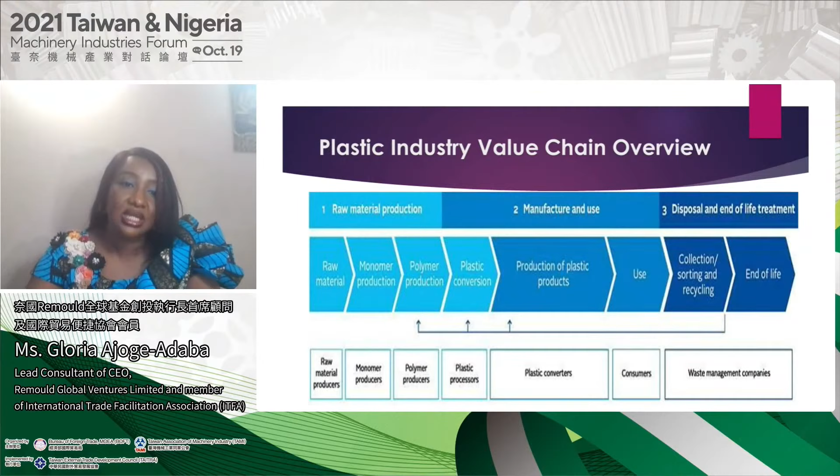An overview of the structure of the plastic industry value chain, from resin raw material production, manufacture and use, and the plastic waste management systems, will give a picture of the present needs in the Nigerian plastic industry. Let's start with raw material production of the plastic industry in Nigeria.

Indorama Eleme Petrochemicals plant in Port Harcourt, Nigeria South, is currently the largest producer of plastic resin in Nigeria. Its plants are designed to produce about 360 kilotons of polyethylene PE and 120 kilotons of polypropylene PP per annum. Polyethylene is produced under two major categories: high-density polyethylene HDPE and linear low-density polyethylene LLDPE. Polypropylene is produced under three main categories: homopolymer, random copolymer, and copolymer.

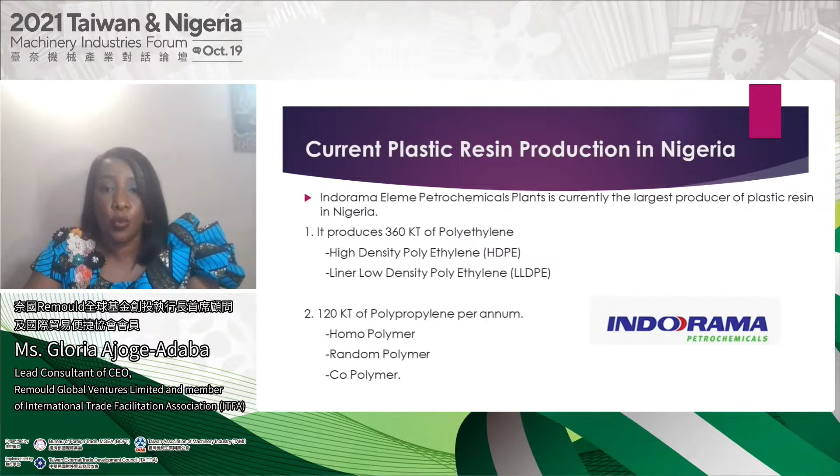Engee Polyethylene Terephthalate Manufacturing Company in Nigeria has a continuous polymerization system of high-quality food-grade PET resin plant in Ogun State, in southwestern Nigeria. A globally accredited supplier of PET, Engee has a daily PET resin production capacity of 450 tons and an annual capacity of 150,000 tons.

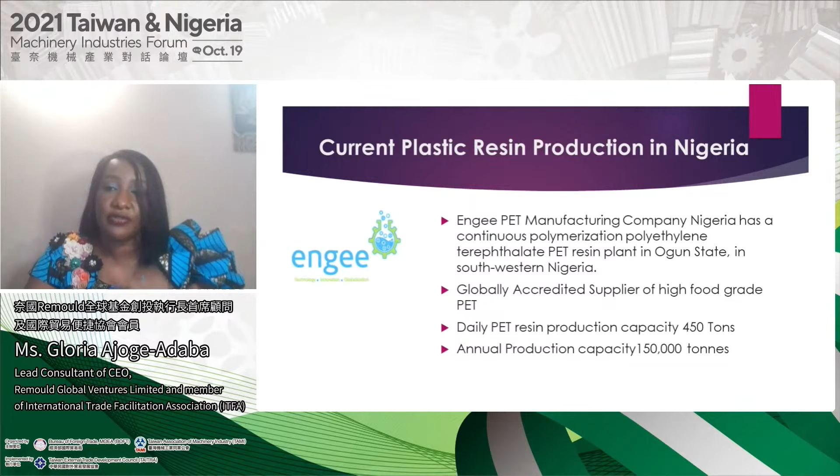Plastic manufacture and use: In 2015, Nigeria's plastic consumption reached around 1 million tons. This figure was estimated to be about 1.5 million tons as of 2020. With an increased annual population growth rate of 2.5%, this consumption is expected to equally increase. According to data published in 2020, 54% of the plastic in Nigeria was used as packaging material, like PET, PP, and PE. In addition, 16% of plastic was consumed by the construction industry, the second largest sector consuming plastic in Nigeria. Plastic packaging accounts for the largest plastic consumption in Nigeria.

Considering the large and growing population in Nigeria, and with manufacturers still having to import resin into the country to meet production demands, and in order to meet the growing demands of the Nigerian plastic market, this provides plastic machinery and business opportunities in this part of the plastic industry value chain.

With the foregoing information, it is evident that the market for LLDPE and HDPE and PP resin are currently the highest consumers in the Nigerian market. However, with the natural resources available in the country and the necessary machinery, Nigeria is ready for the production of more of the much needed resins for indigenous use and possible exportation.

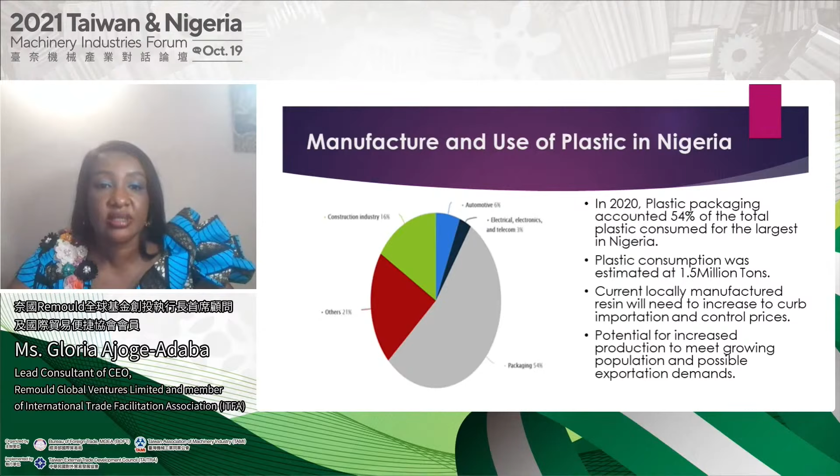Production of other types of engineering plastics such as nylon, PVC, ABS, etc. can also be explored. Machinery opportunities therefore cover all resin manufacturing machines such as extruders, injection blow molders, etc.

Post-use treatment: the impact of single-use plastic waste on the Nigerian environment is very drastic. Single-use plastic products are more likely to end up in our gutters and seas than reusable options. They constitute a major percentage of our solid waste stream. Since Nigeria lacks a structured waste source sorting system, solid waste collected from end users is largely commingled.

The initial part of this value chain, namely collection and sorting, are still manual processes in Nigeria. This gives room for mechanized waste material recovery systems and sorting opportunities, with a view of building more material recovery facilities across the nation, which will largely improve raw material acquisition for plastic and other waste recyclers in Nigeria.

Other machinery to enhance plastic collection and processing include balers, crushers, and plastic recycling lines for various types of plastics.

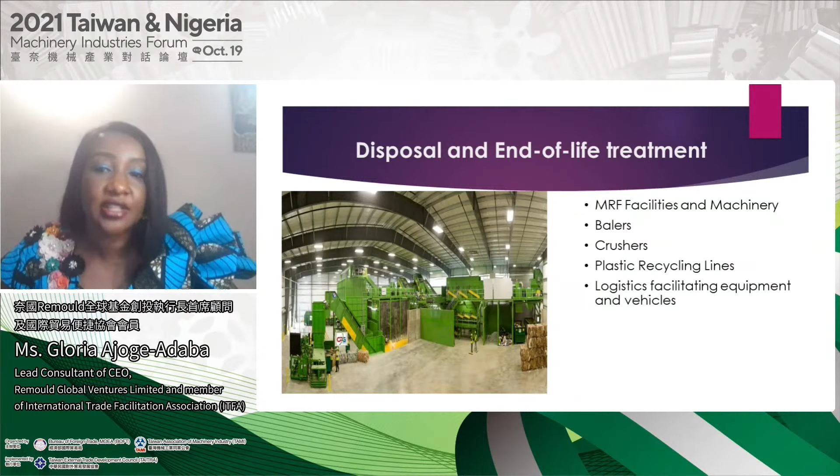The Nigerian rubber industry: natural rubber is grown as a cash crop in about 18 states, covering an estimated 18 million hectares of land. The vast amount of land and favorable weather conditions indicate that the surface of business and machinery opportunities in the Nigerian rubber industry has barely been scratched, from farming to processing. The technical structure of natural rubber production, from plantation establishment, maintenance, exploitation, processing to marketing, offers vast machinery and business opportunities.

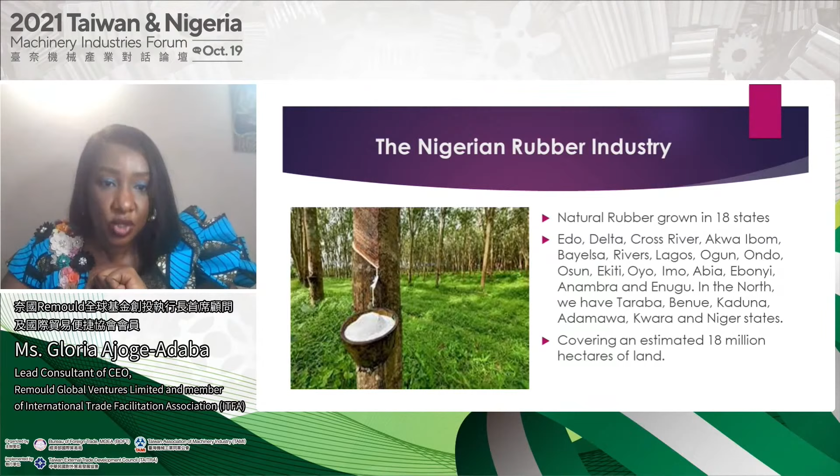Nigeria is the second largest producer of natural rubber in Africa after Ivory Coast, and 12th in the world. As at 2018, Nigeria's annual production of natural rubber was approximately 150,000 tons, a bare 1.1% of the world rubber output share, losing about $39 billion in the global rubber industry.

Industry analysts observed that the country has failed to take advantage of the multi-billion-dollar financial opportunity in the rubber industry, considering the federal government's economic diversification campaign in the non-oil sector.

Tire production facilities in Nigeria are currently closed down, and local consumption of natural rubber is now confined largely to the footwear sector. With appropriate machinery, adequate funding, training, and availability of land and human resources, the Nigerian rubber industry has the potential of leading the world.

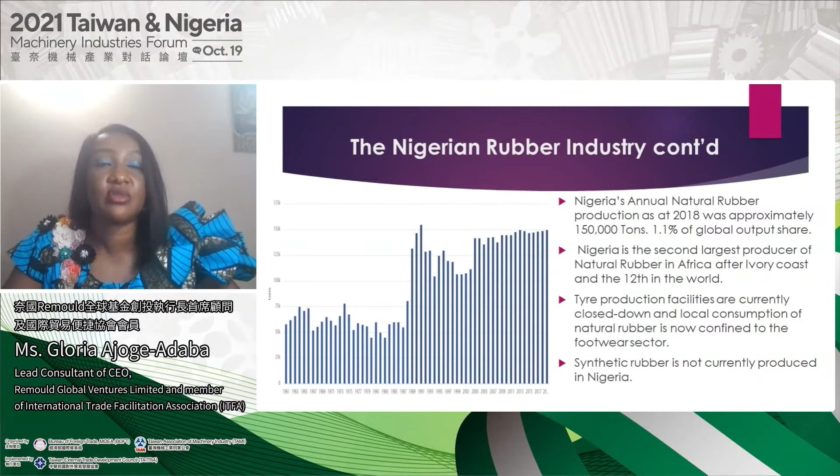Synthetic rubber is not currently produced in Nigeria, giving not just a machinery business opportunity, but an opportunity to start the Nigerian synthetic rubber industry, which will cover all necessary machinery required for the production of different types of synthetic rubber and their products.

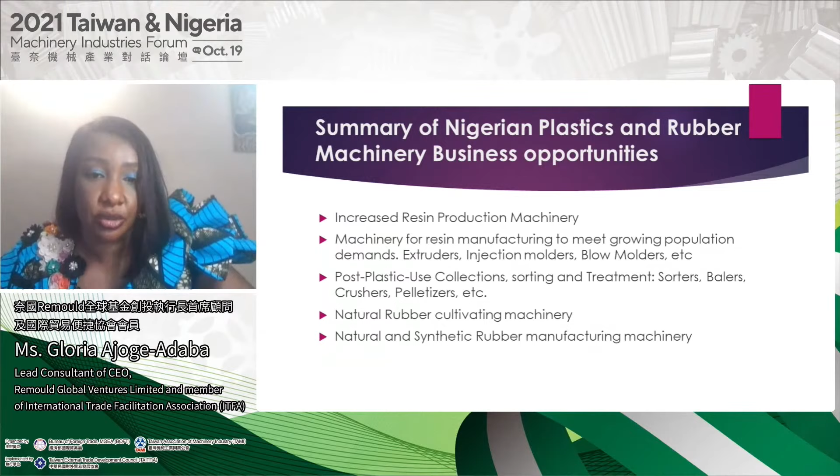Tooling machinery for precision in indigenous machine making and spare parts production, which would enhance operation efficiency and productivity. Research and development laboratory testing equipment to increase quality control and develop adequate data for industry growth and development.

Finally, it is pertinent to note that compliance with government policies and industry regulatory bodies are a major driving force in developing and growing any industry in Nigeria and the world. Also, building joint national trade agreements that would help bolster industry creation and development would go a long way in achieving business or industrial growth, ensuring that all potentials and glaring opportunities will be translated into increases in national gross domestic product.

Networking within local and internationally related sector professional bodies will also help keep existing and prospective plastic and rubber industry business owners up to speed and at par with global innovations and dynamics of plastic and rubber industries.

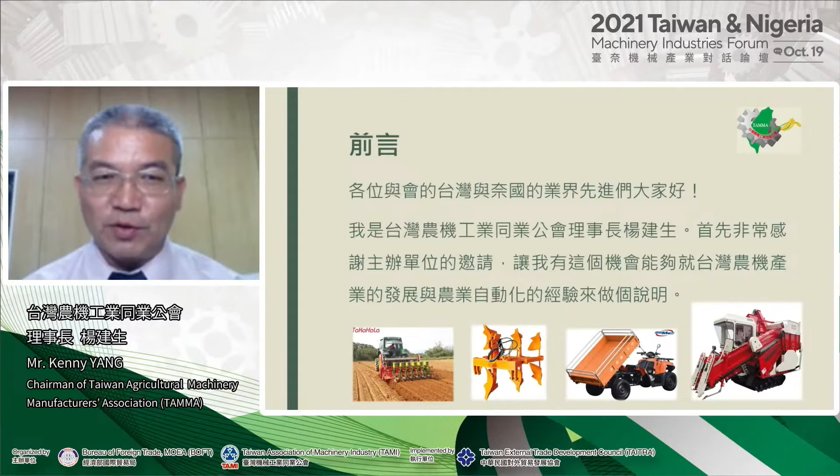First of all, I would like to express my gratitude to the organizers for the invitation. I would like to take this opportunity to talk about the development of Taiwan's agricultural machinery industry and agricultural automation.

According to the data I collected, the largest cash crops in the country are cassava and yam. Rice is also gaining status as a popular food crop. However, according to our statistics, flours are also very important to Nigeria. According to regulation, flour imported to Nigeria must include 10% tapioca flour.

In addition, cocoa beans, peanut, banana, rubber, sorghum, millet, corn, sesame seed, cotton, and palms are also products of significant account. The area of arable land available is large, and if the land is planned properly, productivity and yield will be greatly increased.

As for the status of agriculture, take rice for example: from seedling, transplant, the utilization of pesticide and fertilizers, to drying and storage, 90% of the process involves machinery in Taiwan. So we have a very complete automated process.

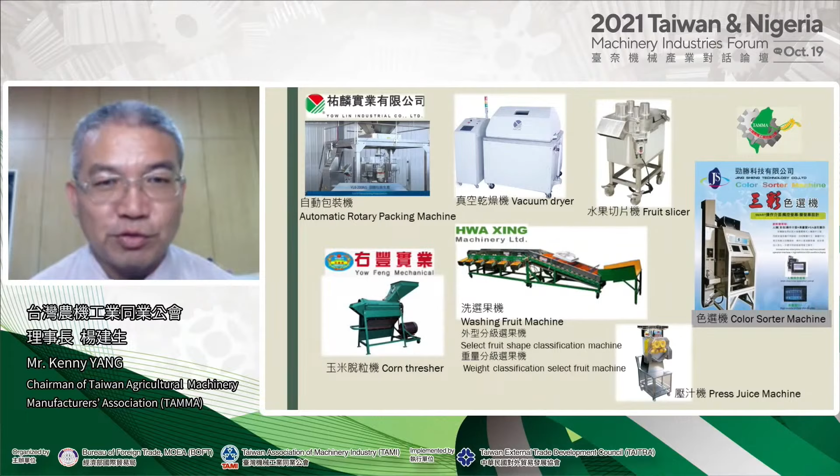almost all are homemade in Taiwan, including automated seedling equipment, spraying machinery, fertilization dispenser machines, drones for spraying fertilizer, drying machinery, milling machinery, selecting and sorting machinery, packaging machinery, low-temperature storage equipment, and even processing machinery for rice, food, and liquor. All these can be designed, manufactured, and assembled in Taiwan. Taiwan also exports this machinery to Europe, Asia, Africa, and America.

As for the production of cassava, according to our research, the planting requirements of cassava are similar to sugarcane in Taiwan, which is why we can modify the sugarcane planting machine for automation of the crop.

However, the harvesting of cassava resembles that of sweet potato. The harvesting machinery for sweet potato is already stored in our machinery index. We can modify this index to fit the specific lands in Nigeria.

Now cassava can be harvested with machinery efficiently, and there are also machines for subsequent drying, slicing, flour production, fermentation, and distillation. Taiwan also has production machinery that's automated for agricultural use.

As for peanuts, sorghum, corn, and sesame seed, Taiwan has machinery for land consolidation, sowing, fertilization dispensing, harvesting, drying, storage, and all types of food processing, such as cooking, frying, and oil extraction.

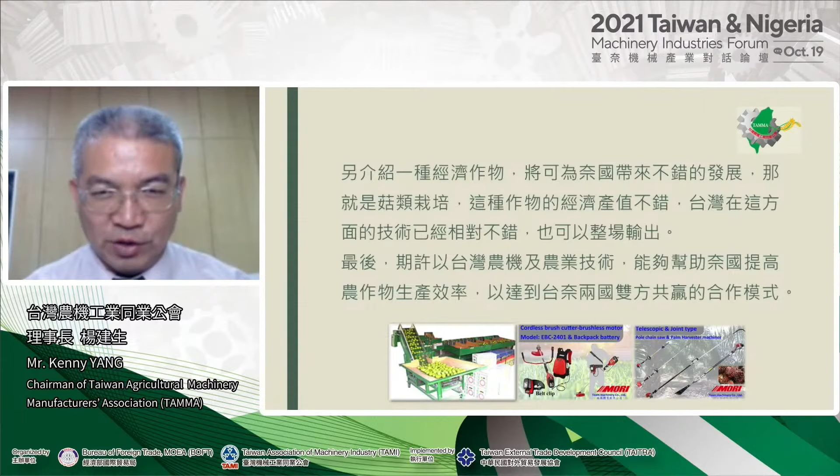Taiwan is very skilled in the cultivation of mushroom. We have a very automated system for small and large-scale mushroom cultivation. Taiwan's agricultural machinery and technology is very mature and will be able to help Nigeria in improving production and efficiency, cutting down on the use of human resources, and we're able to achieve win-win cooperation between the two countries.

Due to time constraints, it is impossible to give a detailed and complete description of the agricultural machinery and agricultural industry in Taiwan. So if you're interested in learning more about agriculture and machinery, you are very welcome to contact us. We will not hesitate to help in the implementation of agricultural machinery in Nigeria and to explore business opportunities in Nigeria. We hope that the pandemic will release its grip soon and we will be able to live in peace and calm. Thank you.

First, let's start with the industry outlook.

Taiwan has about 400 machinery manufacturers for the plastic and rubber industry. They are mainly located in the central and southern part of Taiwan, and we form a comprehensive supply chain for the world.

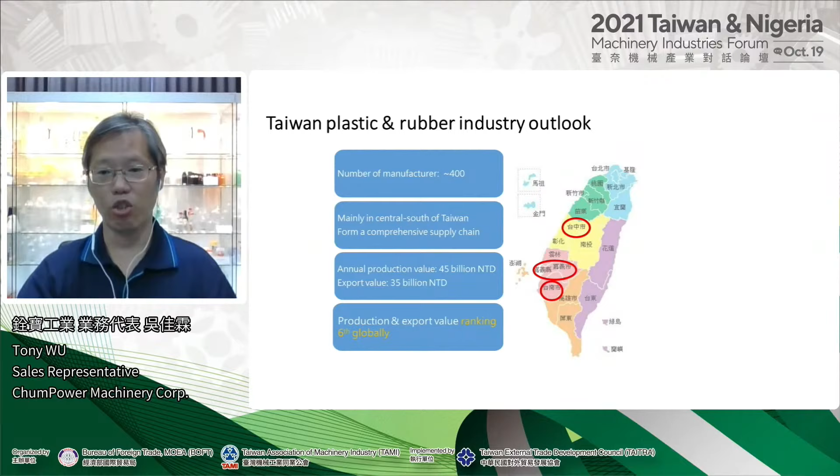The annual production value is estimated around 45 billion NTD, or 1.6 billion US dollars. The export value is estimated around 35 billion NTD, or 1.3 billion USD. Currently, Taiwan is ranking 6th place in the world in terms of annual production and export value.

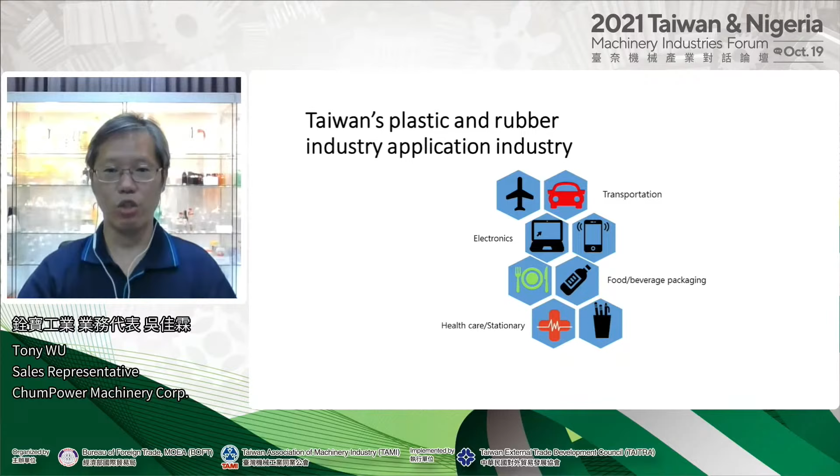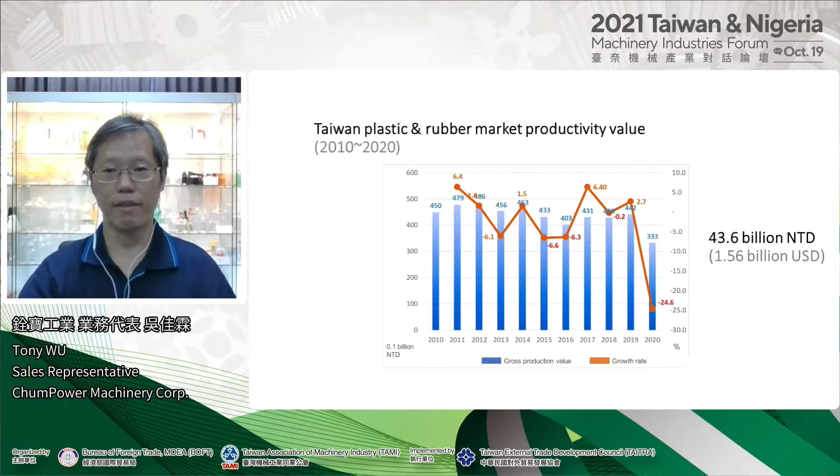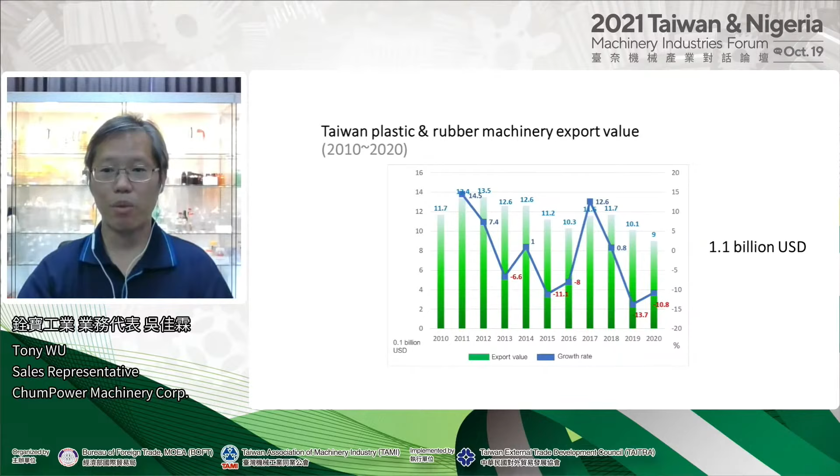The applicable industries range from transportation, electronics, food and beverage packaging, healthcare, and stationery. This graph represents the productivity value of Taiwan's plastic and rubber industry for the past 10 years. As you can see, Taiwan produced close to 1.6 billion USD annually before the pandemic. For the year 2020, Taiwan experienced a slowdown of around 25% compared to 2019. Before the pandemic, 1.1 billion US dollars out of 1.6 billion was exported globally, so it's safe to say that Taiwan exports around 70 to 80% of what we produce to the world.

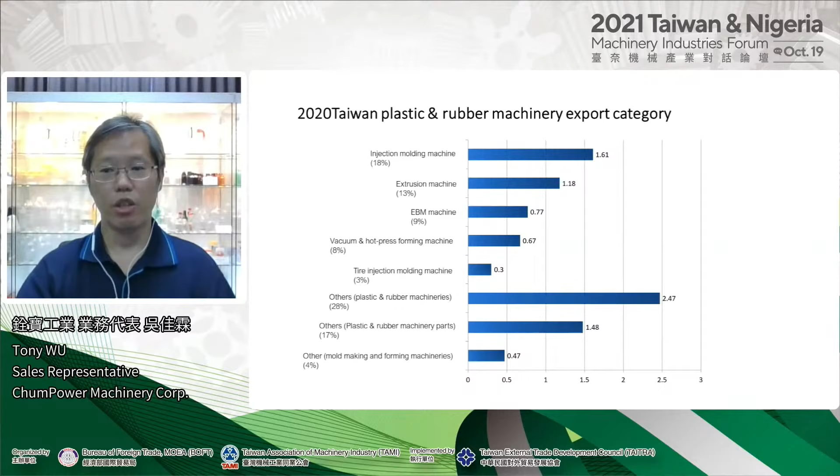This graph is a breakdown of the types of plastic and rubber machinery that Taiwan produces. The top 3 types are injection molding machines, extrusion machines, and extrusion blow molding machineries. The top 5 countries we export to are China, Vietnam, United States, Indonesia, and Japan and Thailand, tied at 5th place. So the sales activity for us is generally concentrated in Asia, Southeast Asia, and the US.

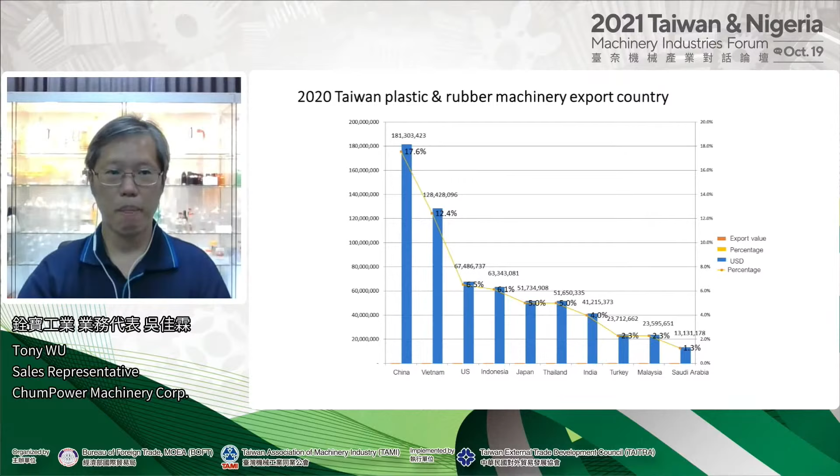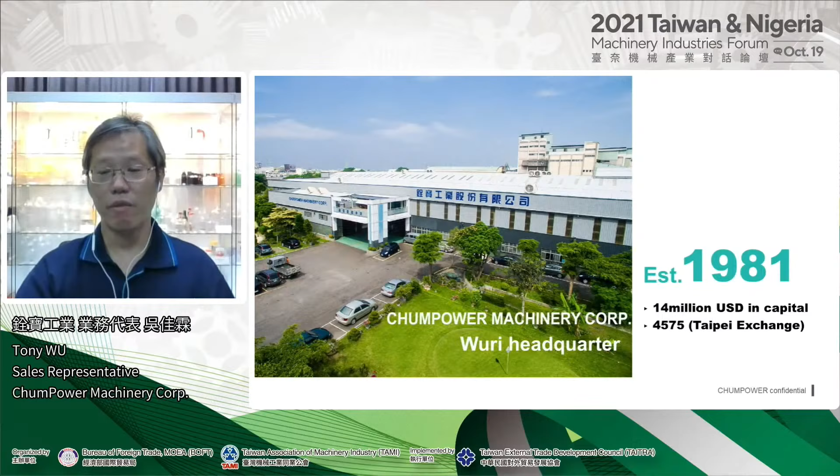Now I'd like to take this opportunity to introduce ChumPower Machinery. ChumPower was established in 1981, and in the past 40 years we have grown into a public company with 14 million US dollars in capital. We are now listed as 4575 on the Taipei Exchange. ChumPower has 4 business divisions: precision tooling, green packaging, intelligent agriculture, and blow molding machinery.

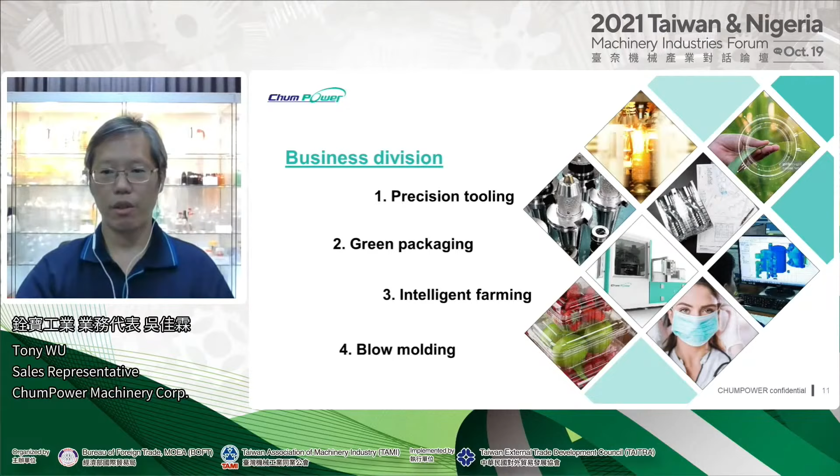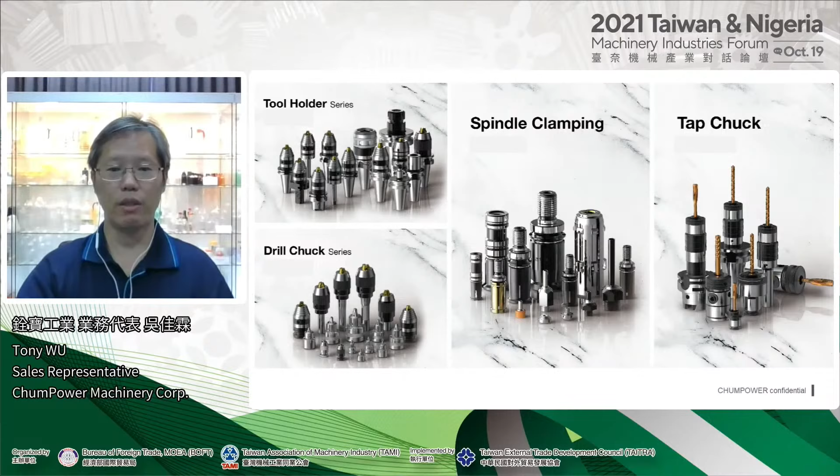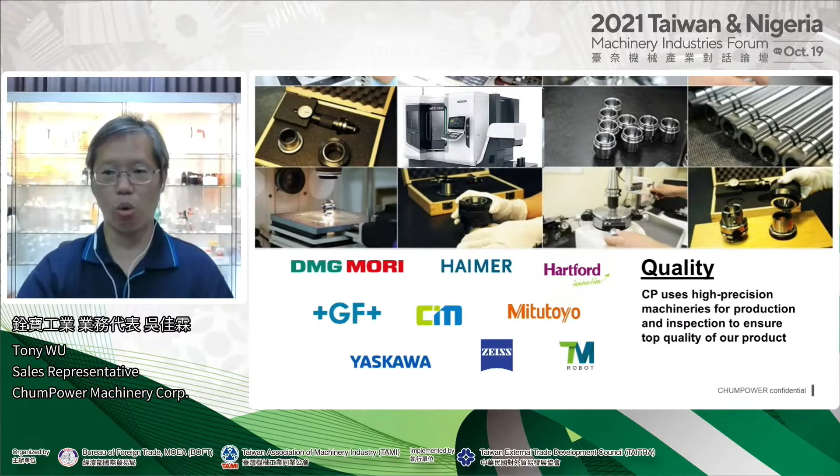First, the precision tooling. ChumPower has produced wide ranges of precision tool holders and drill chucks for the CNC machining industry. We also use high precision machinery for production and have very strict QC procedures to ensure the quality of our product. Our precision tooling is then sold worldwide.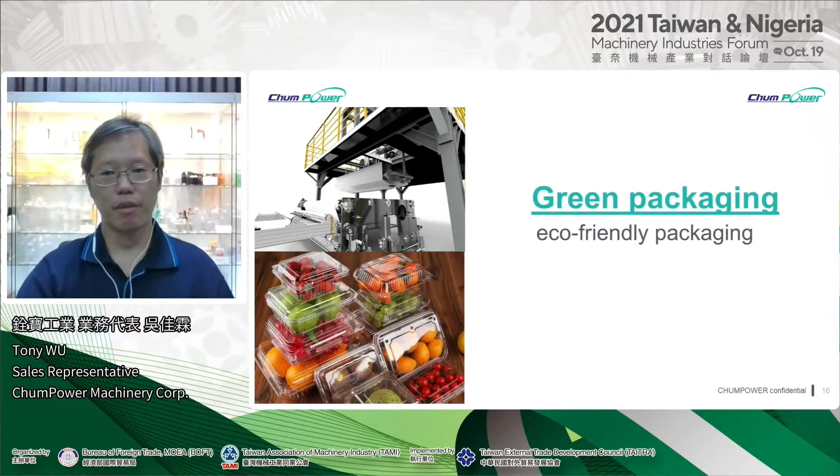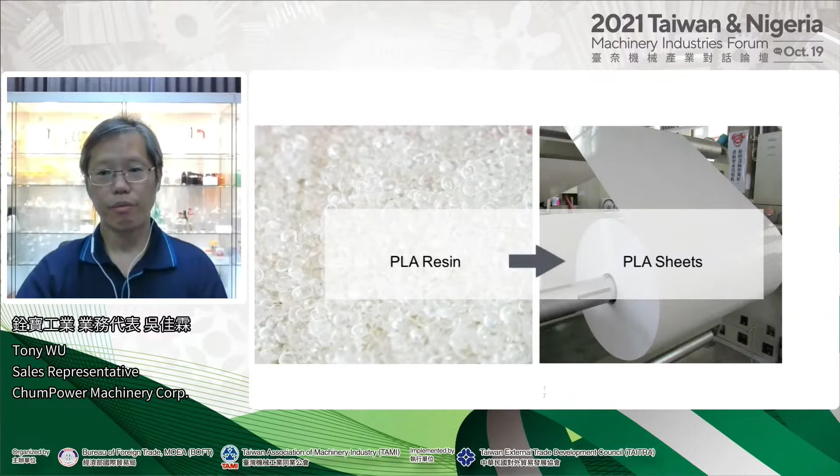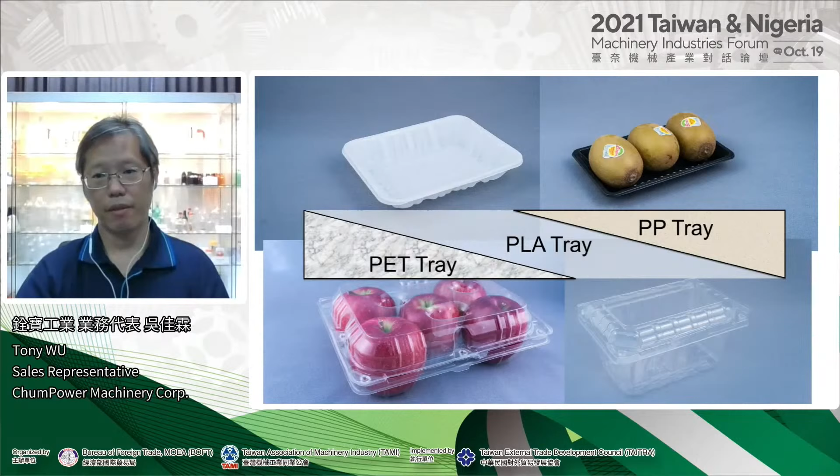Green packaging, the second part of our business division, produces thermoform packaging and melt-blown fabric. For the thermoforming part, we can use PLA or PET to produce the thin film first, then we use thermoforming process to produce the rigid packaging for the food industry. Other materials such as PP can also be used to make the tray. Our productivity ranges from 250 to 450 kilograms per hour, depending on the type of film we use.

ChumPower also offers melt-blown fabric and mask machines, so our customers can make their own melt-blown fabric layers for masks. We can also source the spun lace and spun bond layers for our customers so they can start making masks.

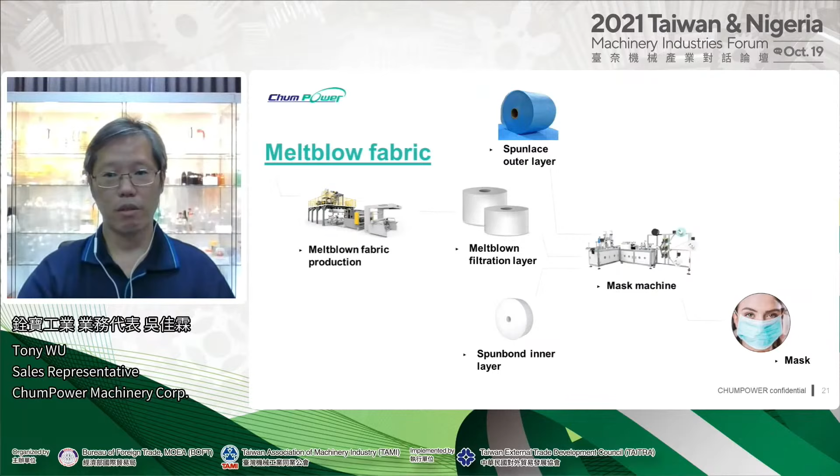The third division is smart agriculture, where by using IoT technology, we create a system which gathers information such as weather and the geology of the farm. We use that data to formulate a pesticide spraying session. We believe that this system will improve farming efficiency.

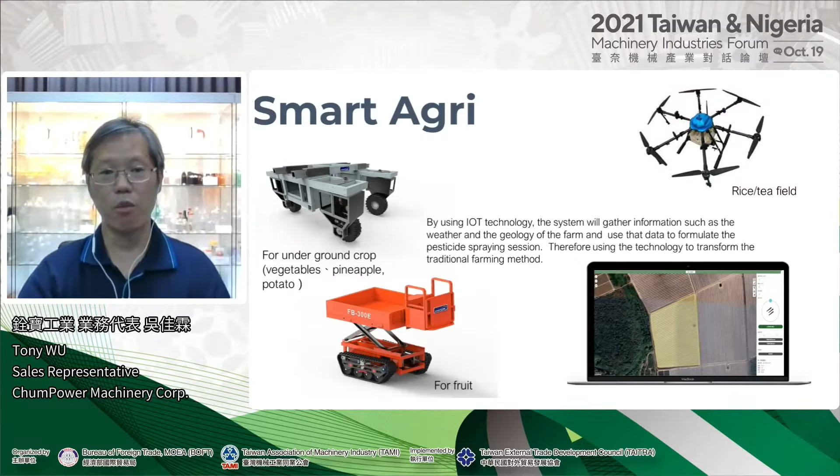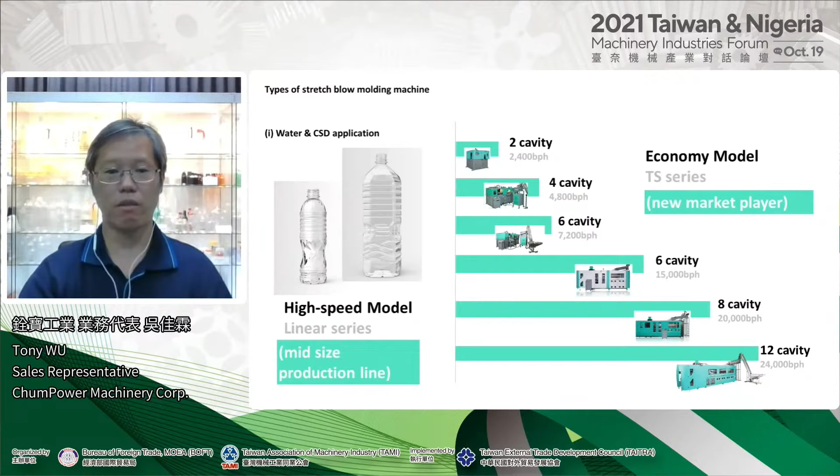Now we talk about the stretch blow molding division of ChumPower Machinery. We have machines for all types of applications. For water and CSD, we offer TS series machines for lower production output, great for a new market player just entering the beverage industry. For customers looking for higher output, we have linear series machines, perfect for medium-sized bottled water production lines. We also have WL series and 3-cavity linear machines designed dedicated for edible oil applications.

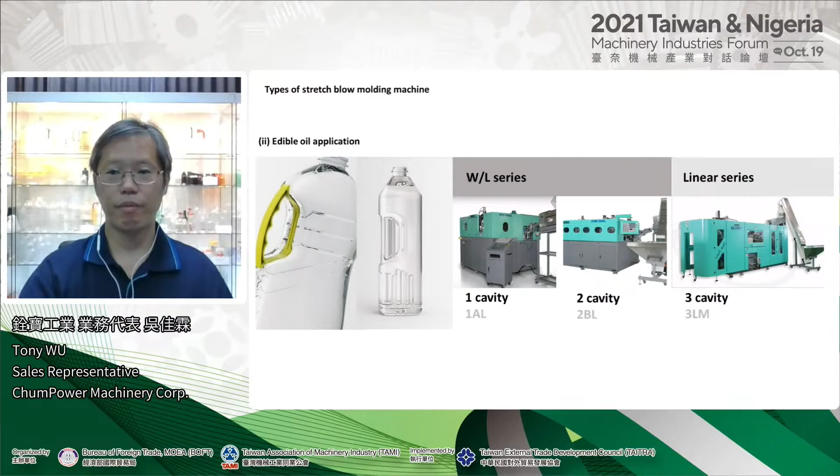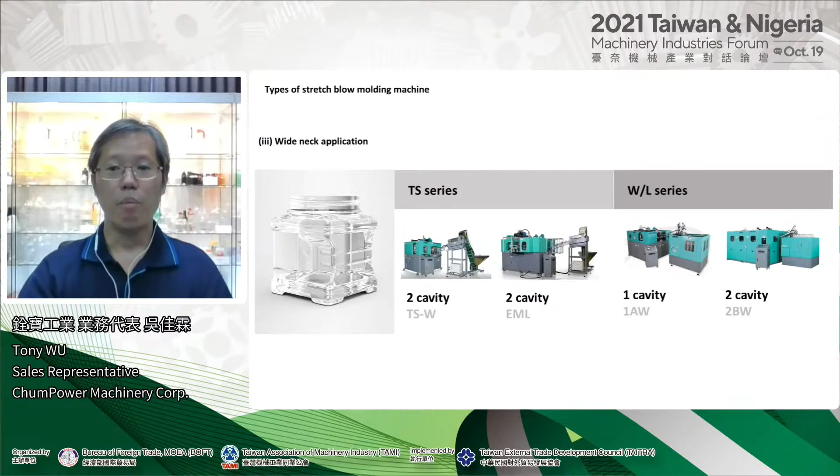The market for wide neck applications is pretty good for ChumPower. Many converters start processing this type of bottle for generic packaging, or for ketchup or salad dressing sectors. Many of our customers in the bottled water industry, including family-sized water, the size ranges from 6 liters to 5 gallons as part of their product portfolio. ChumPower offers great solutions for these sectors too.

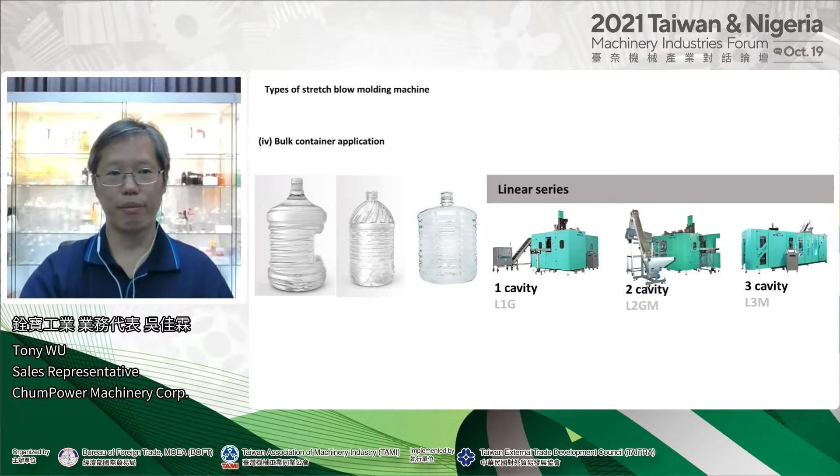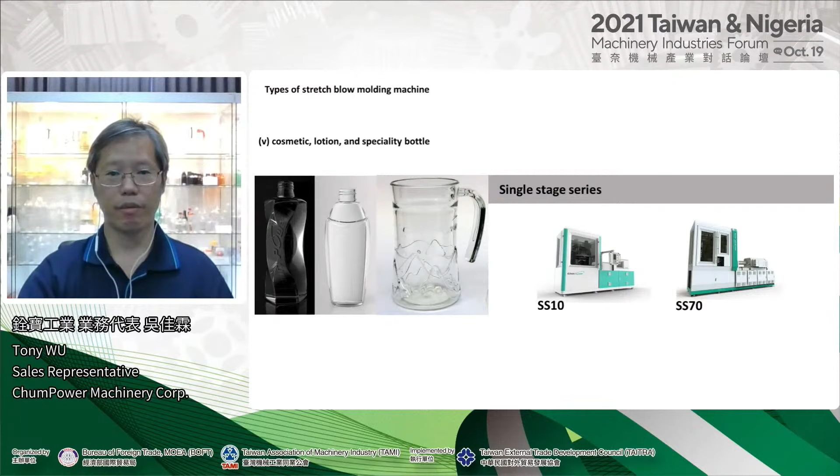ChumPower exports stretch blow molders globally, and Africa is a very important part of the market for us too. In fact, it accounts for about 20% of our total export. We have many bottled water manufacturers in Africa using our machines as part of their production lines.

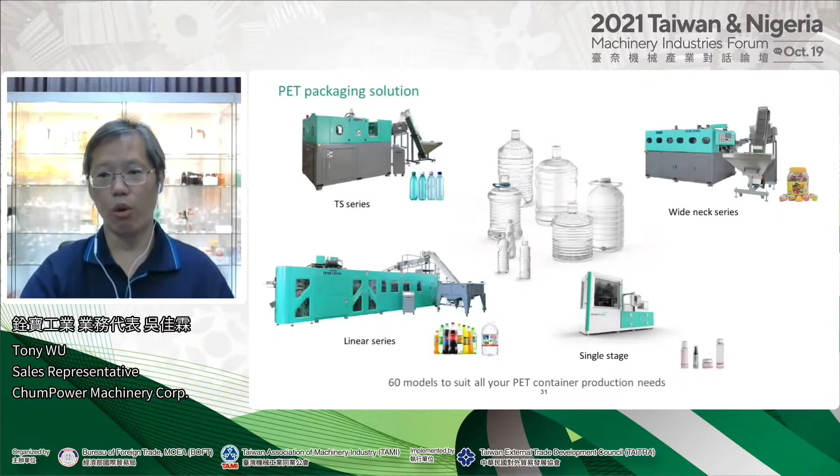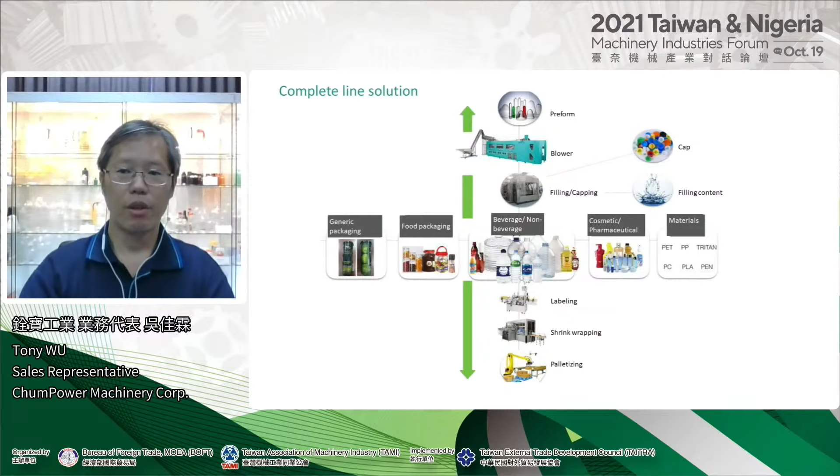In conclusion, ChumPower offers over 60 models to suit all your production needs. We also offer complete line solutions from bottle production to palletization. Therefore, be sure to speak with us before making any purchasing decisions.

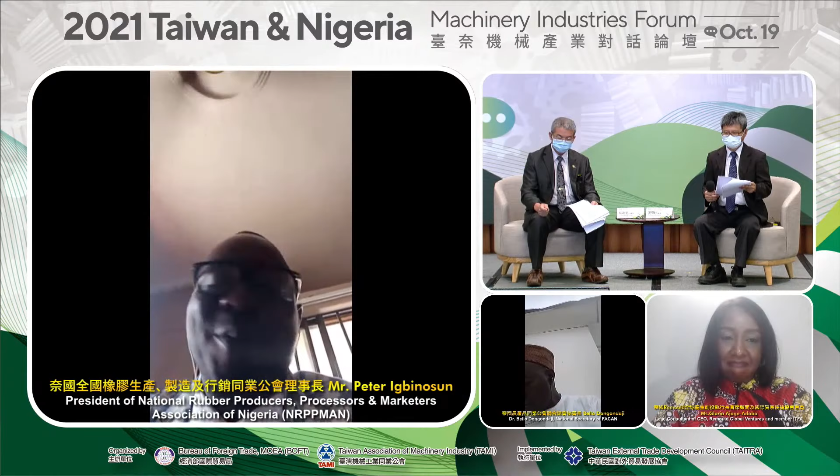Today I would like you to know that despite the fact that Nigeria is third - maybe Gloria is not aware of this now, we have just moved backward one step. We were second before, we are now third in Africa. And in terms of export, we are 23rd in the world. In 2020, the export revenue gotten from rubber was $20.9 million, as compared to a country like Cote d'Ivoire that had $1.3 billion. So the reason is not far-fetched.

Presently, I think we need to commend the government of Nigeria - especially the Federal Ministry of Industry, Trade and Investment, the Federal Ministry of Agriculture and Rural Development, the Nigerian Export Promotion Council, and the Raw Material Research and Development Council. They are doing their best to see that rubber is revived in Nigeria, because like Gloria said, we have about 1 million hectares of rubber land suitable for rubber cultivation. And that's only for the south. We have just discovered some other states in the north where we can produce rubber - states like Adamawa, Kaduna, and Taraba in the core north.